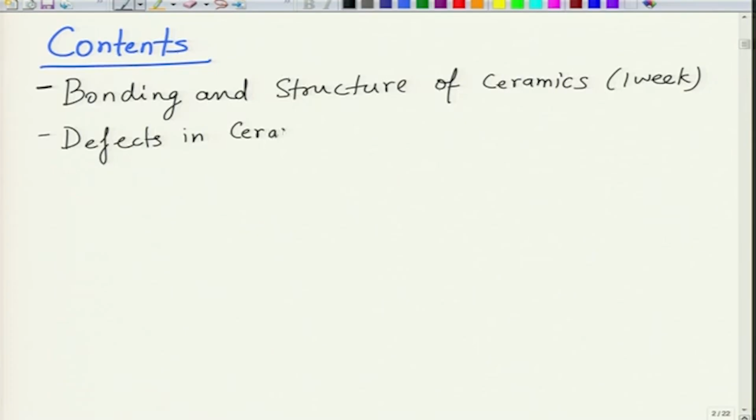And then we will move on to a very important topic in ceramics, which is defects in ceramics. And defects in ceramics are very important to understand. Defect chemistry, especially defects in dielectric ceramics. Well, dielectrics are ceramics also, so it could be more generic. So this we will do over week 2. Here we will talk about what kind of defects prevail in dielectric ceramics, what happens when you add impurities to them, what happens when you change partial pressure of oxygen, because most of them happen to be oxides. As a result, when you change oxygen partial pressure, there is a tremendous influence on the characteristics or properties

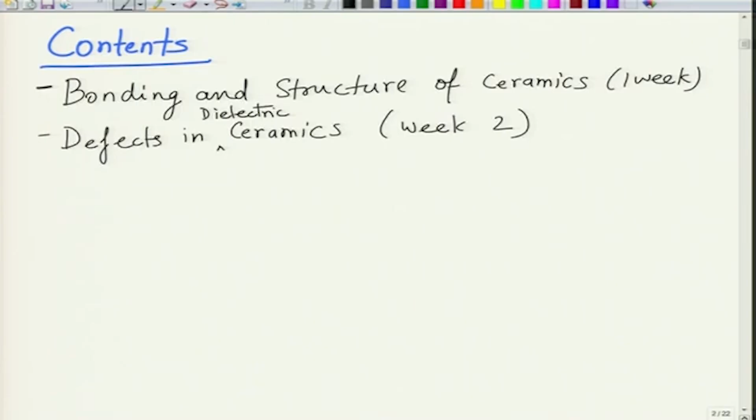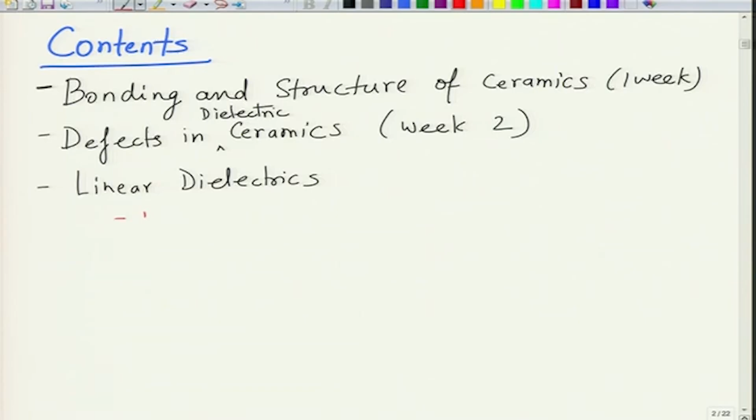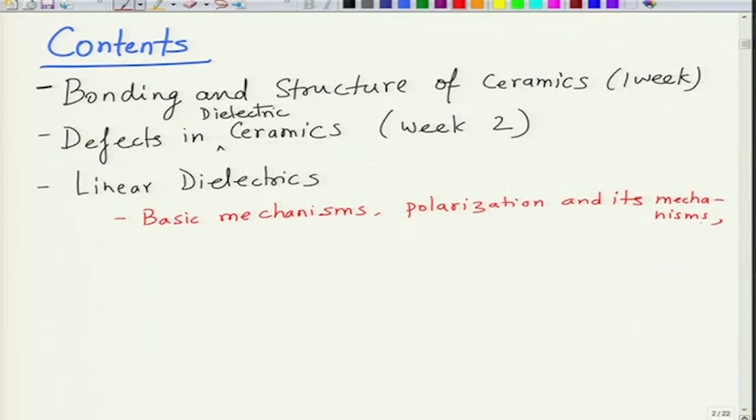of these materials. And then we will move to what we call linear dielectrics. Linear dielectrics are those dielectrics whose polarization behavior as a function of electric field is linear. And here we will first look at the basic mechanisms of dielectric materials. We will look at what is polarization and its mechanisms. Then we will look at what is polarizability. We will look at the frequency dependence, and of course dielectric constant, that is also an important bit.

Frequency dependence of the above, and then we will look at impedance analysis, because it is important to analyze the impedance spectra of dielectric materials to understand their behavior completely, and then we will perhaps look at certain applications. So this will constitute about 2 weeks, which is week 3 and 4. There could be some overlap between weeks, but we will try and stick to our schedule.

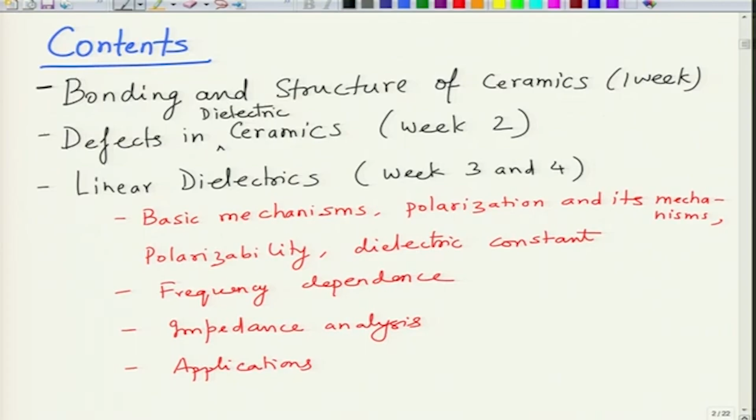And then we will move on to what is called nonlinear dielectrics. We will see what is the meaning of linearity and nonlinearity in the subsequent course of time as we learn about it. And in this case we will learn about the basics of these materials. Then we will look at the classes of materials. We will discuss each of them. So we will start from piezoelectrics, then we will go to pyroelectrics, and then finally ferroelectrics. All these three materials are technologically extremely important, and that is why it is important to understand the fundamentals of these materials, the classes of these materials.

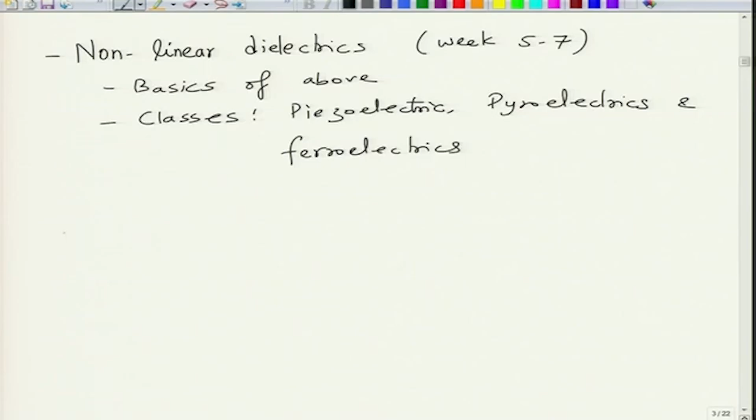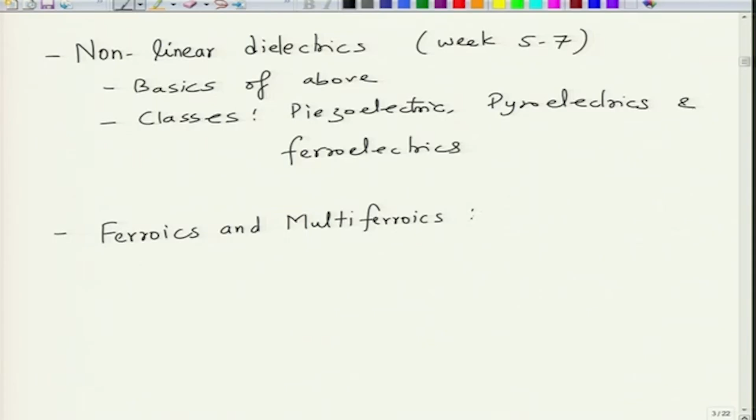So this will constitute about 3 weeks, week 5, 6, 7. There is a possibility of a little spillover from the previous weeks, so there could be certain overlap, and then finally we will move on to ferroics and multiferroics, and there we will basically introduce this new topic of multiferroics, looking at the types of multiferroics, what are the materials, what is the importance of these materials, what are the challenges, what is the current status, and this will constitute week 8. So this is the overall overview of the contents of the course that we will undertake as we progress

in this course. Now let me go to the bibliography. What are the books that you are going to follow? And here the first thing is essential bibliography. So these are the books that you require for yourself. So first will be Physical Ceramics: Principles for Ceramic Science and Engineering.

This is a book written by Y.M. Chiang, D.P. Birnie and W.D. Kingery. It's published by Wiley VCH. So the first few chapters, especially from the perspective of structure, bonding and defect chemistry. Okay. So these are the topics which this book covers well.

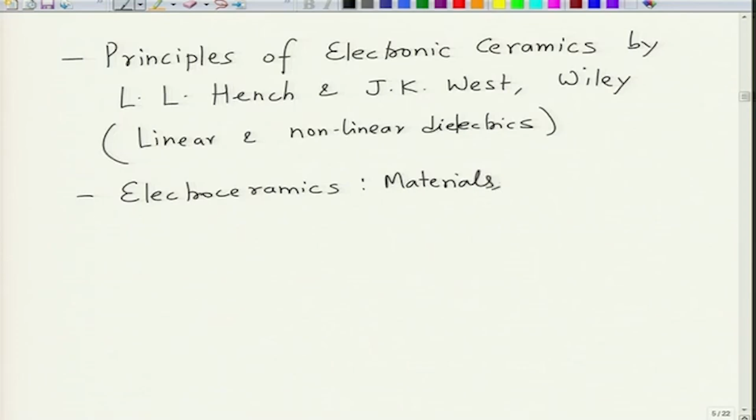We may also look at Electroceramics: Materials, Properties and Applications. This is by J. Moulson and J. M. Herbert, and this is again a Wiley published book. Again this is good from the perspectives of properties of ceramics and applications.

And from the perspective of defect chemistry, there is one very specific book that I would recommend to you. If you have time, you can read it. That is Non-stoichiometry, Diffusion and Electrical Conductivity in Binary Metal Oxides by P.K. Kofstad, and this is again John Wiley and Sons. This is very good from the perspective of defect chemistry.

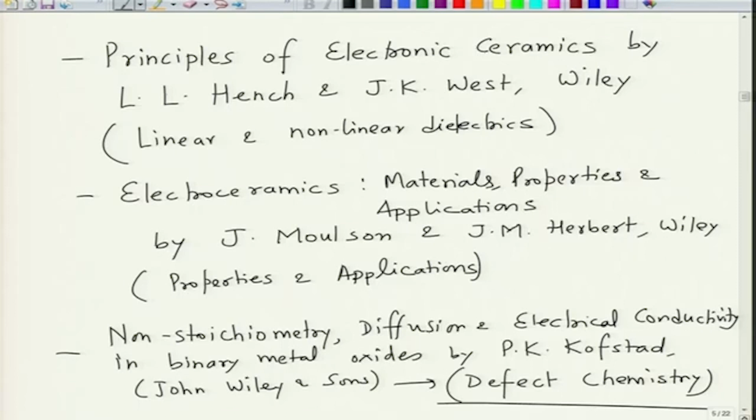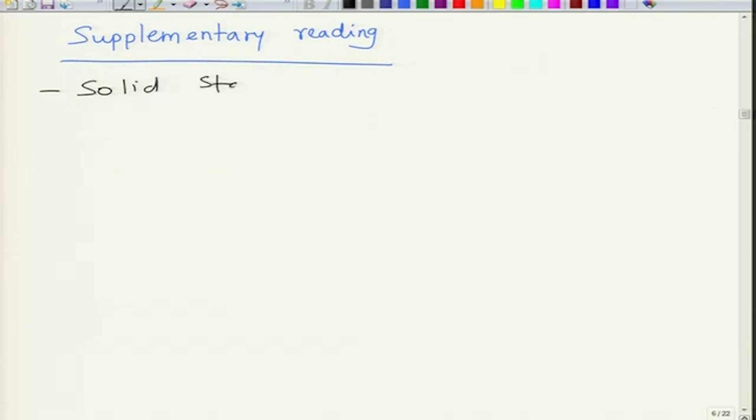If you are interested in defect chemistry, you can look at this book by Per Kofstad or P.K. Kofstad, that is Non-stoichiometry, Diffusion and Electrical Conductivity in Binary Metal Oxides. And then there are a host of other books, so I can just say that, supplementary reading. So, supplementary reading could be, for those who do not know solid state physics, they can read Solid State Physics by, so the first book would be Kittel. This is a very famous book.

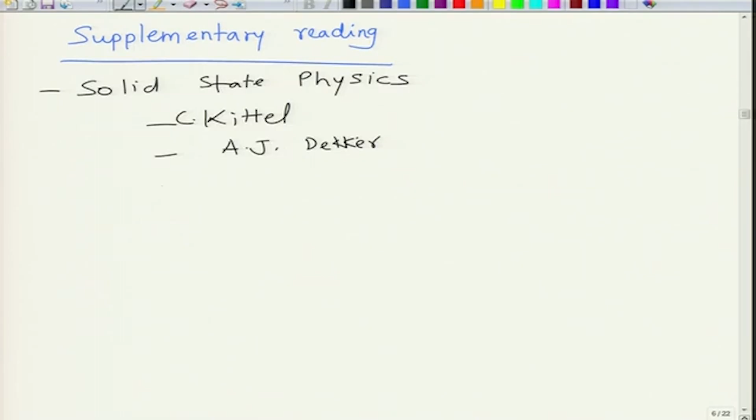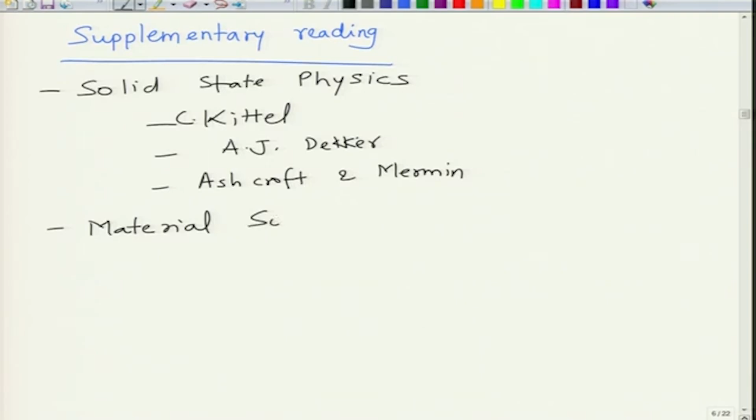Then would be A.J. Dekker. So, this is Charles Kittel, this is A.J. Dekker, and then one can also look at Ashcroft and Mermin. These are three books which will provide you good understanding of basic solid state physics of materials. And then if you are interested in material science basics, I would say the first thing would be to read the book of V. Raghavan, which is a very nice book giving you complete information for the beginners about material science.

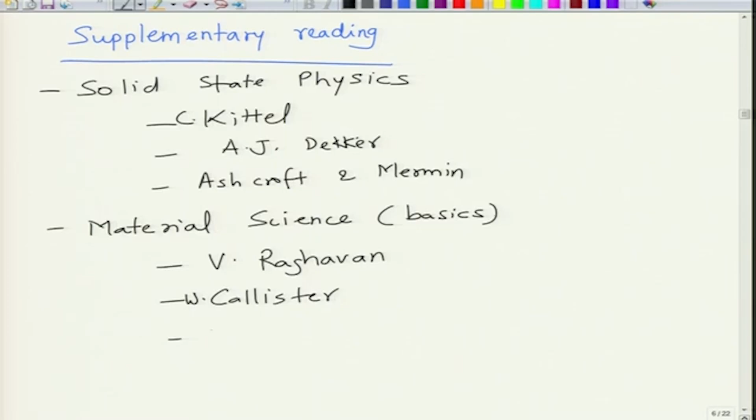Then we have Callister, W. D. Callister. This is again a similar book to Raghavan, but I consider Raghavan a little better in terms of its content. And then we have the Wulff series. So, this is a 4-volume series. We call it Wulff series, but basically it is a material science engineering series from MIT, 4-volume. It is a very old book, but it is a very nice book to read. So, these are the books you can read about improving your material science fundamentals, and these are the books you can read about improving your solid state physics fundamentals.

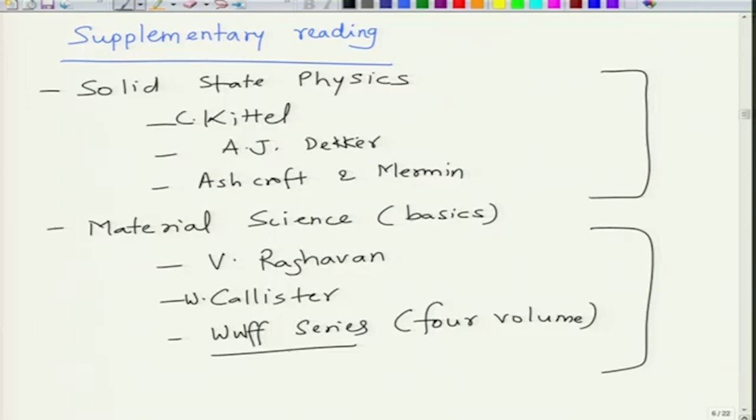So, as I said, the prerequisite for this course is basically nothing significant. If you know basics of structure of materials, basics of thermodynamics, basics of solid state physics, you will do well in this course. The supplementary books that I recommended are the ones you can read to improve your knowledge. And this course is suited for final year or third year undergraduate students of most disciplines, including material science engineering, chemical engineering, mechanical engineering, physics, chemistry, electrical engineering, and so on, and also for fresh graduate students like masters and PhD students.

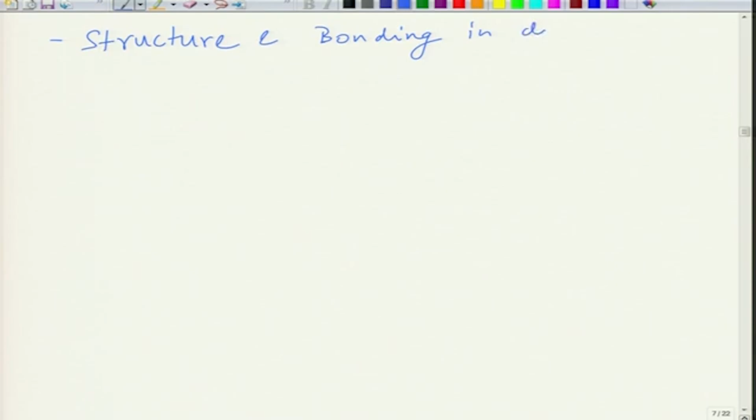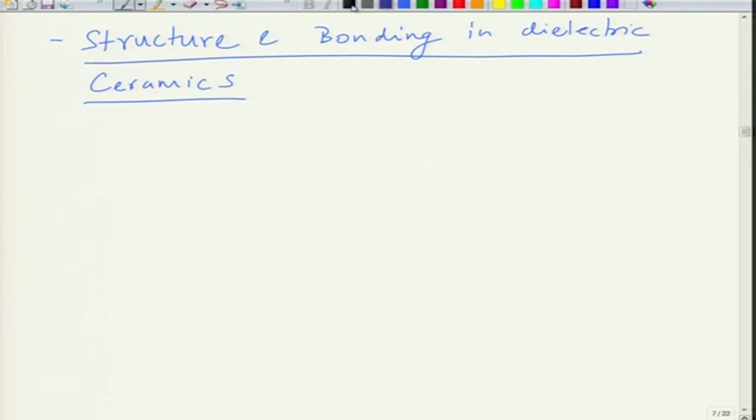So, now let us begin with our course content, the first lecture contents of this course. So, the first module, the first week, is going to be on basically structure and bonding in dielectric ceramics. Now, essentially dielectric ceramics are mostly oxides.

Oxides are generally a mixture of cations and anions. Cations are electropositive, and anions are electronegative. So, cations have tendency to give away electrons, anions have tendency to accept the electrons, and the difference in the electronegativity is a driving force to form a bond between the cations and anions. So, you can have binary oxides.

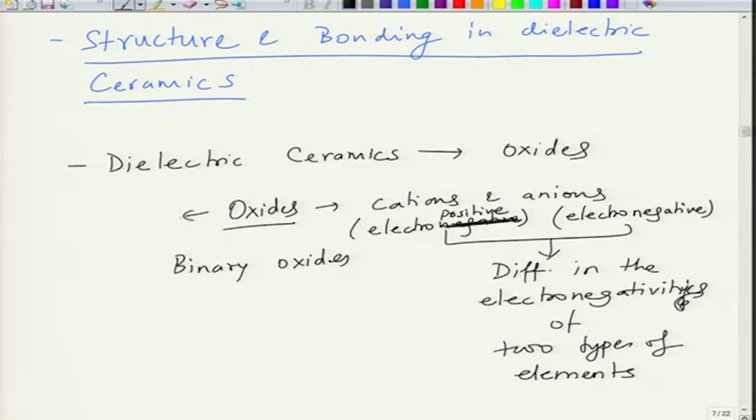So, basically the difference in the electronegativities of two types of elements drives the type of bonding that you will have. So, generally oxides you will find are either covalent, ionic or strongly ionic, or partially ionic with covalent character.

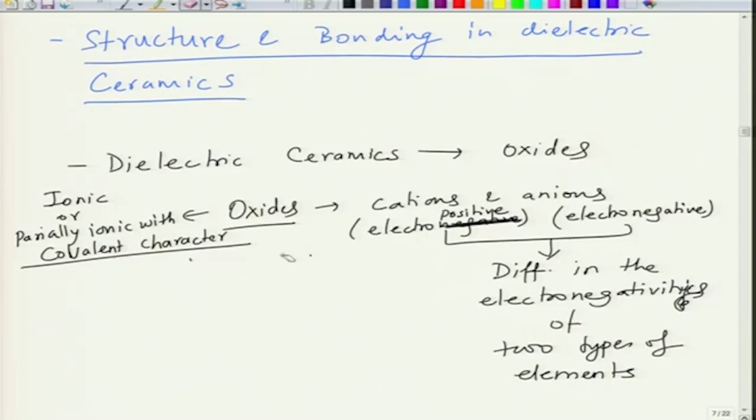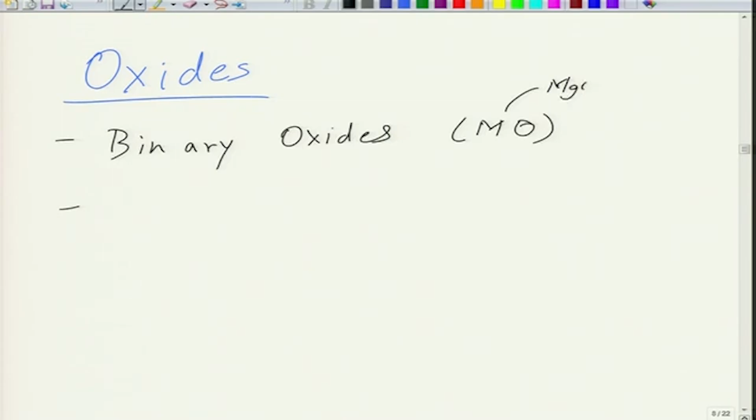So, generally this is the bonding scenario in these materials. So, you may have types of materials as these oxides could be: you can have binary oxides of the form MO, and so, for example, formulas would be MgO, NaCl, NiO; all these are binary oxides.

You can have ternary oxides, which we can say... so binary oxides could be MO, it could be M2O3, it could be MO2 and so on and so forth. So, M2O3 could be something like MoO3, WO3, sorry, Al2O3, Cr2O3 and so on and so forth. MO2 could be TiO2, ZrO2; all these are MO2s.

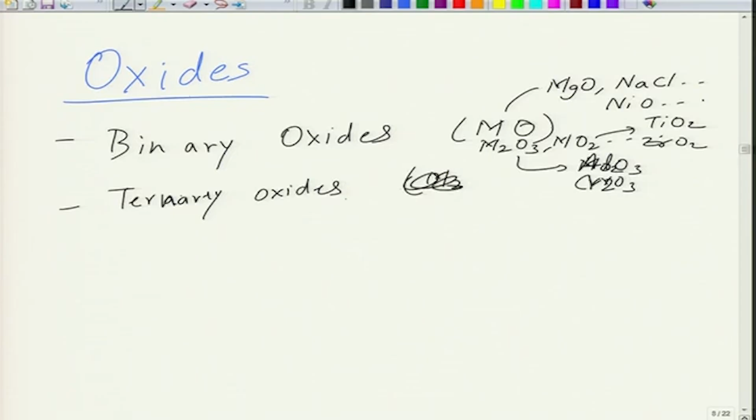You can have ternary oxides. Ternary oxides can be, let us say, ABOx. So, for example, your barium titanate is a ternary oxide. So, you have barium as cation 1, so this is M1, titanium is M2, or you can say A, B, and then of course O, which is the anion.

You can have quaternary oxides. An example could be strontium bismuth tantalate, SrBi2Ta2O9. So, in this case you have 3 cations and 1 anion. So, there are multiple possibilities, but generally we deal with oxides which are binary or at most ternary in nature. There are very few examples of quaternary or pentenary oxides that we use in literature.

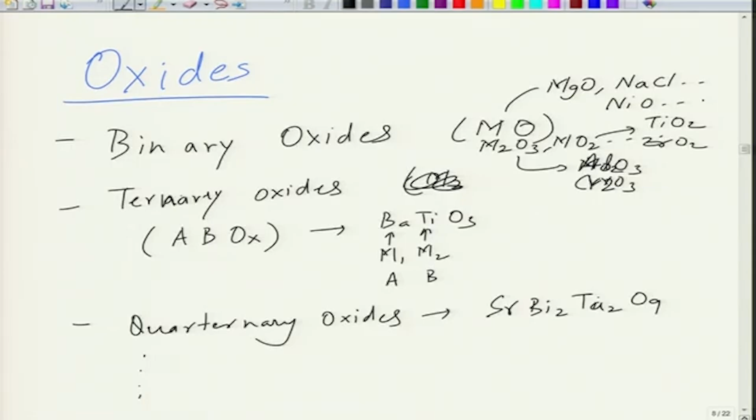Now, given these materials have oxygen in them, they are strongly influenced by the oxygen content and the oxidation states of the elements present in them. Many of the elements tend to be transition elements which have a tendency for valence fluctuations. As a result, there are multiple valences present in the same material, and you may have non-stoichiometries that we will deal with in defect chemistry.

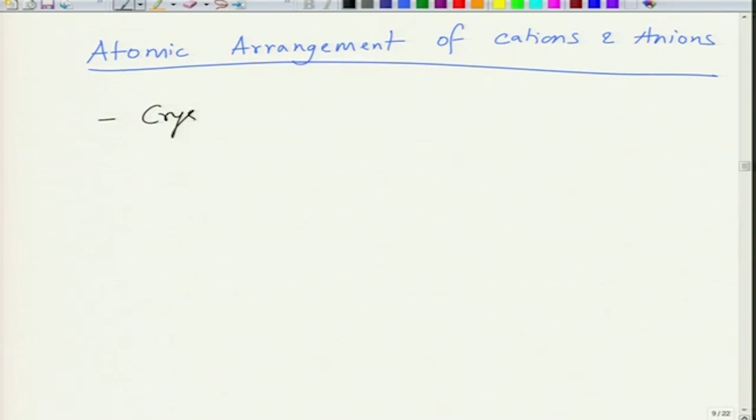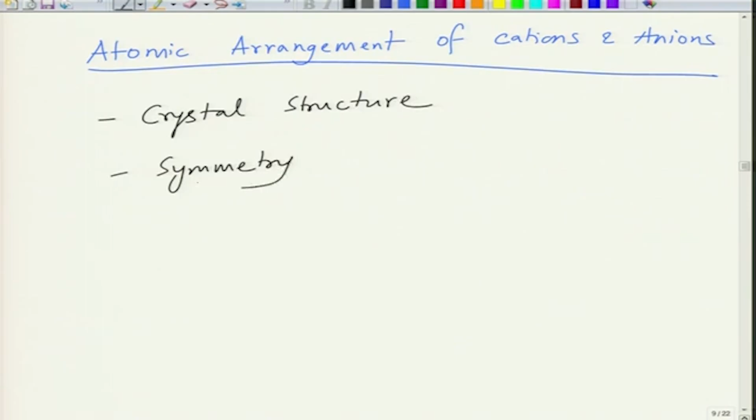So, these cations and anions in these materials have an atomic arrangement. The atomic arrangement of cations and anions gives rise to a certain crystal structure, and they have a certain crystallographic symmetry and space group, which defines their structure and properties.

So, what we will do is first begin with certain fundamentals of crystal structure before we move on to the structure of these materials. As I said, the atomic arrangement of cations and anions determines the crystal structure. As a result, they have certain symmetry, certain space groups, which is important in imparting certain properties to them.

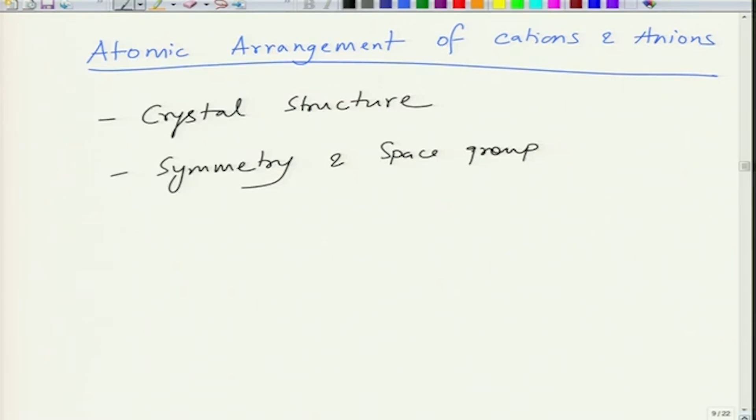Now, what are these materials useful for? Dielectric materials are useful for a variety of applications such as sensors, actuators, data storage, transducers. So, sensors means they are used for sensing. It could be sensing gases, sensing displacements, sensing stress; sensing any kind of stimuli.

Actuator means providing actuation. So, actuators and transducers are devices based on utilizing the mechanical movement in these materials. We will see these are very important. Not all dielectrics can be used for these purposes; only certain types of dielectrics are used for actuator and transducer kinds of applications.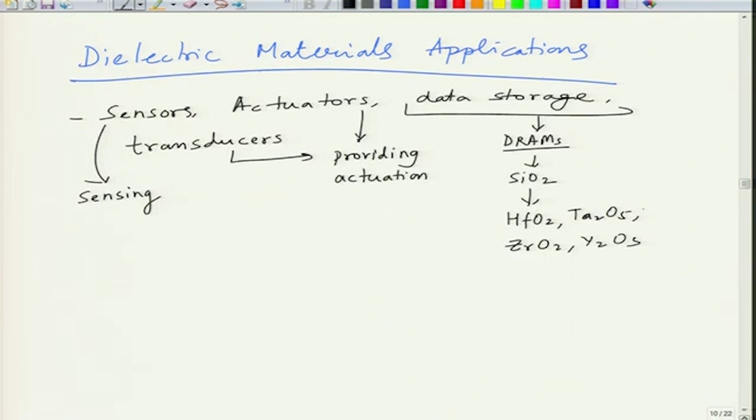They are also useful for data storage. DRAM materials are conventionally made on silicon oxide, but there are a lot of materials which replace silicon oxide, such as hafnium oxide, tantalum oxide, zirconium oxide, yttrium oxides, and here the property that is important is dielectric constant. The dielectric constant of the material is exploited to make these thin films and dynamic random access memories for storing data.

They can also be used for optical devices, because these dielectric materials have certain optical properties, but we will not deal with optical properties. And there are materials such as barium titanate, lead titanate, and so on, which are nonlinear dielectrics, used for sensor and actuator kinds of applications, as we discussed above.

So, there are a lot of applications of these materials, and as we go along the course, while describing certain classes of materials, we will look at some of the applications in a bit more detail. So, this is the brief intro of dielectric materials. Now, let us go to the nitty-gritty of the structure of these materials. We will first discuss the structural aspects.

Now, by structure here I mean... a structure can be defined at various scales. You can have electronic structure, which is the structure at the electronic level. You have atomic structure, at the atomic level, and then structure at the micro/nano level, which is microstructure or nanostructure, and then what we call macrostructure.

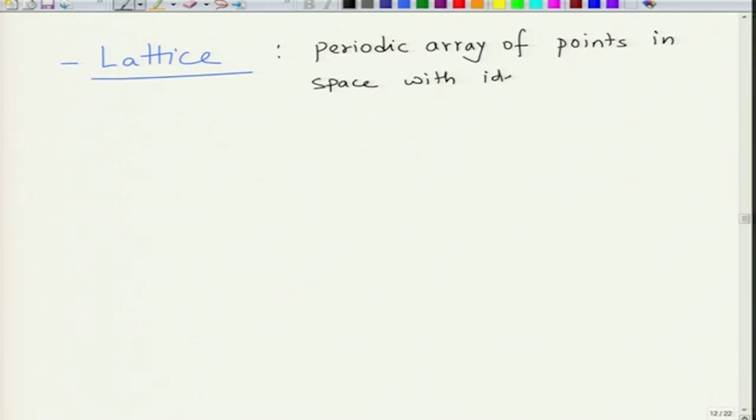So, as far as structure is concerned, the first important thing you need to know is what is called a lattice. A lattice is basically a periodic array of points in space with identical neighborhood.

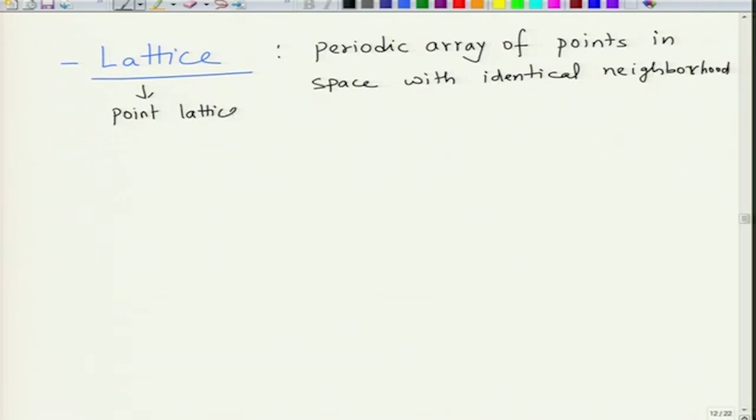Okay, so this is basically a point lattice, right. So, any kind of arrangement like this, where you have a periodic arrangement of points in space, and each point, whether you look at this point, this point, or this point, all of them have identical neighborhood. This is called a point lattice.

You can have this kind of arrangement also, but this will not be a lattice, because each point does not have identical neighborhood. So, this is a lattice, this is not a lattice. Okay. So, this is the first concept, that a point lattice has regular arrangement of points in space with identical neighborhood. It is periodic, identical neighborhood, and it has regular arrangement of points in space. This is what a point lattice is.

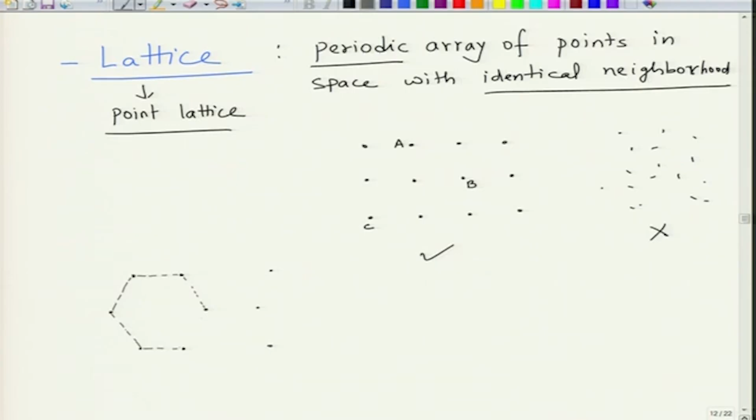There are possibilities where you can make lattices which have very nice looking arrangements. So, for example, if I make this arrangement here, I will not draw too many. I will just draw it using a different color. So, if you just go down one more point here and another point here maybe. So, all these points have equal spacing with respect to each other, sort of hexagonal. It is sort of distorted here, but it is sort of a hexagonal network.

But if you look at this point A and this point B, the neighborhood is not identical. For A, you have one point on the right, 2 points on the left at certain angles. For B, you have 2 points on the right, 1 point on the left. So, this is not a point lattice, even though it looks like a regular ordered arrangement.

However, if I make this kind of arrangement, let us say, and I put points here, here, here, here, here, here, and additionally I put points at the center, then whether I look at point A or B, all of them have identical neighborhood, which means this is a point lattice. So, basically a point lattice is a regular periodic arrangement of points in space with identical neighborhood.

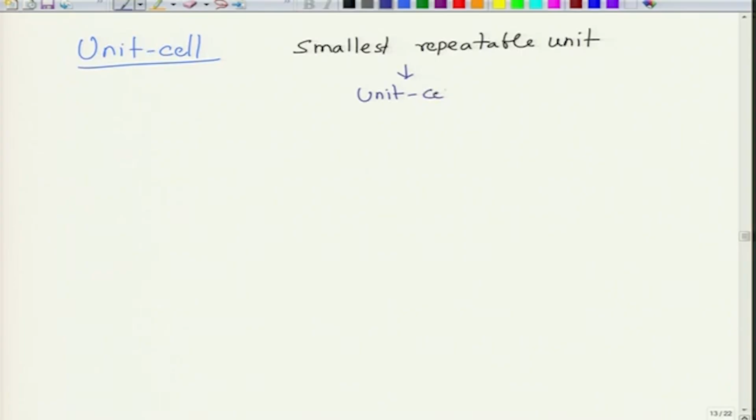This is the definition of point lattice, and within a point lattice you can create what we call a unit cell, which is the smallest repeatable unit. Okay. So, within this you can create a unit cell, something like that. So, this is a unit cell, and a unit cell has certain parameters, lengths and angles. So, we define them as A, B, gamma in case of 2D, and in case of 3D we define them as A, B, C and alpha, beta and gamma. These are called unit cell parameters.

Now, the choice of this cell is not unique. You can make any shape unit cell. So, for example, in this case you can make this as a unit cell, but it is also possible to make this as a unit cell. Okay. So, this is where the question arises, what kind of unit cell shall we choose. This is determined by what we call symmetry considerations, based on the shape, the lattice parameters we define, and the symmetry.

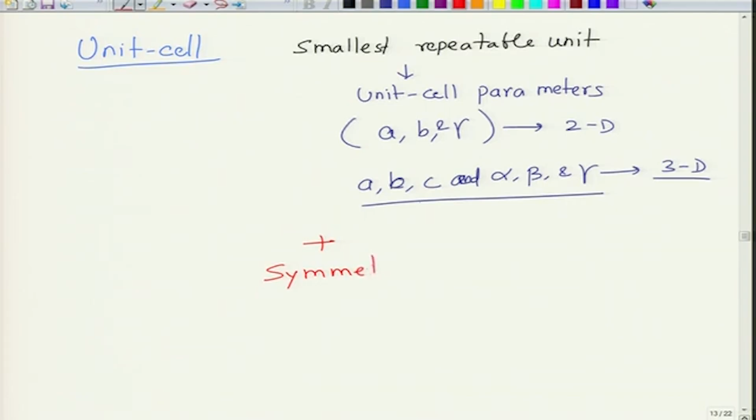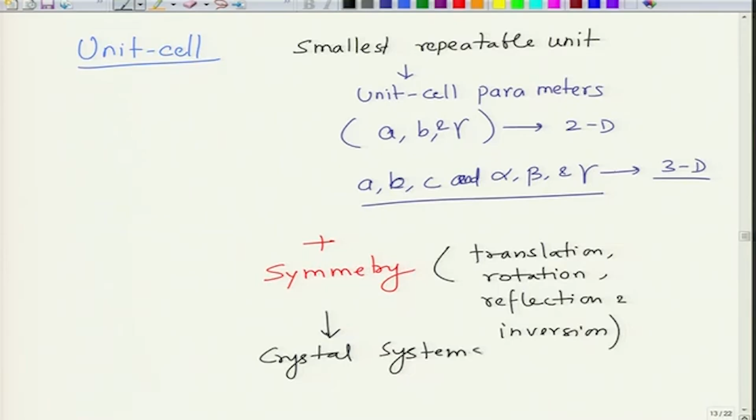So, if you add symmetry considerations, there are certain symmetry operations which have to be performed. These symmetry operations are translation, rotation, reflection and inversion. So, if we perform these symmetry operations, then what we generate is what we call crystal systems. So, as I said, the choice of unit cell is not unique. Okay.

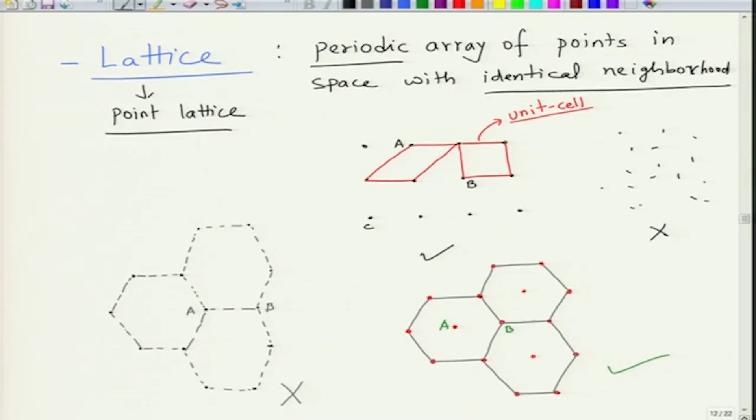So, as a result, it is also possible to choose a different shape for the smallest unit cell. You can have multiple shapes, they will be similar in area and they will contain only one lattice point. So, that is why you have to evolve a system which is called a crystal system, which takes into consideration the aspects of symmetry that we will discuss in the next lecture.